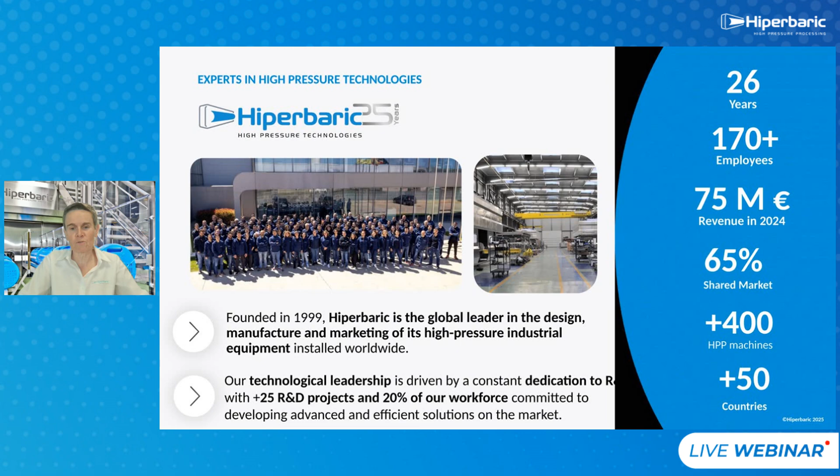Our development is really based on R&D, and we have been doing more than 25 R&D projects to develop our technology, our machines, and to help our customers develop their technology too, or to follow the needs of the food industry. The headquarters of Hiperbaric are in Spain, where I am and where Berta is. And we have sales and after sales in USA, in Miami, Florida, and also in China, in Shanghai. And we have after sales in Oceania and in Mexico. So we cover all over the world to be able to give the service that our customers need.

So starting really with the interest of HPP for juices and beverages in the industry. First, I would like to summarize the benefits for you if you are not very familiar with the technology. This is a non-thermal, minimal processing and clean label preservation technology. Non-thermal means no heat. And for juices, the advantage is that we can give a fresh-like quality for beverages, for juices, for tea, for many beverages. I will give some more details later. We can extend the shelf life of fresh juices. We enhance, of course, the food safety because we kill microorganisms. Berta will give more details in her presentation.

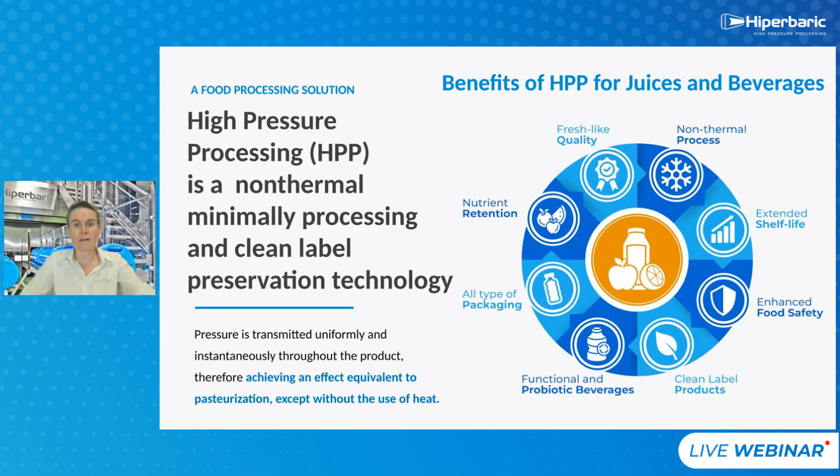We can retain the nutrition, the beneficial components of the fruit, of the beverages or tea, coffee, or whatever, because we do not overprocess and we do not heat. But the effect on microorganisms is like heat pasteurization. So it's pasteurization, but without heat. And we can use both technologies, in pack and in bulk. We can use all types of packaging, and the technology is now available in bulk for carton packs or for glass. I will explain a little bit more later.

What are the parameters? With the machine, we can achieve 87,000 psi, 6,000 bars, 600 MPa, and the processing time for juices and beverages is between 30 and 180 seconds.

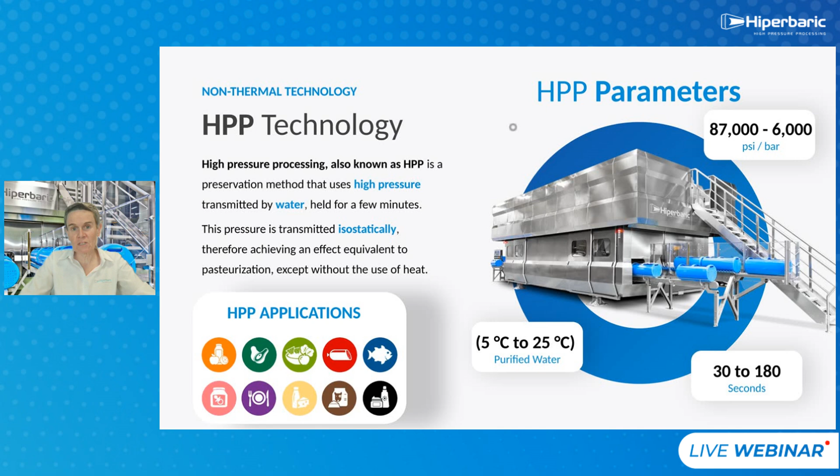And we process the juice at refrigerated temperature, classically. So in any case, below room temperature, in general from 5 degrees up to 25 if we need. In a few minutes, we can really have a pasteurization-like effect, but without thermal treatment.

How much pressure? Well, it's very big, very huge. So it's 6 tons per square centimeter. So it's 6 times more than the biggest pressure we can find in the deepest part of the ocean, in the Mariana Trench. So this is very huge, and this is the pressure we need to be able to kill microorganisms.

With this pressure, you need to imagine that in the vessel of our machine, the juice is compressed about 15%, so the volume itself decreases under pressure. Of course, after depressurization, when we release the pressure, the volume is coming back. So if you have a bottle of 1 liter, at the end of the process it's still 1 liter, but under pressure it was something like 0.85 liters. So we compress, the molecules are closer, and we make some slight molecular change in the microorganisms, and we kill them.

But this molecular change is not enough to modify the properties of the juice. But I don't want to spoil the presentation of Berta, so you will know a little bit more later.

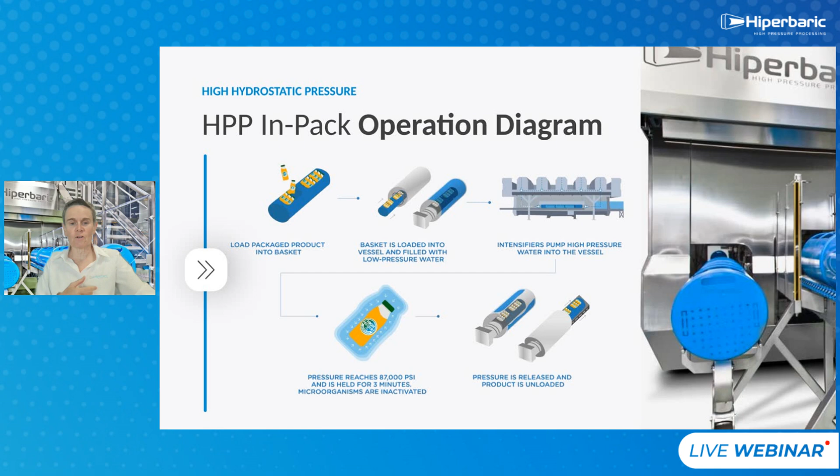How does it work? With the in-pack HPP machine, we place the juice or the beverage in the bottles, in a canister. This is the blue basket you can see. We push it inside the vessel, and then it's pressurized. And when we depressurize, the basket with the bottles exits.

Our range: we have a large range going, for juices, from 200 or 300 liters per hour up to 4,000 liters per hour machines. So different sizes, between a vessel of 55 liters up to a 525 liter vessel. Each machine is able to do from, I would say, 6 to 10, 11 cycles per hour, depending on the number of intensifiers you have.

And depending on the size and the shape of the packaging, you can fill a little bit more or less juice or beverage in the vessel. So this is why the productivity can vary a little bit, following the type or the geometry of the packaging, and also, of course, the size of the machine and the number of intensifiers it has.

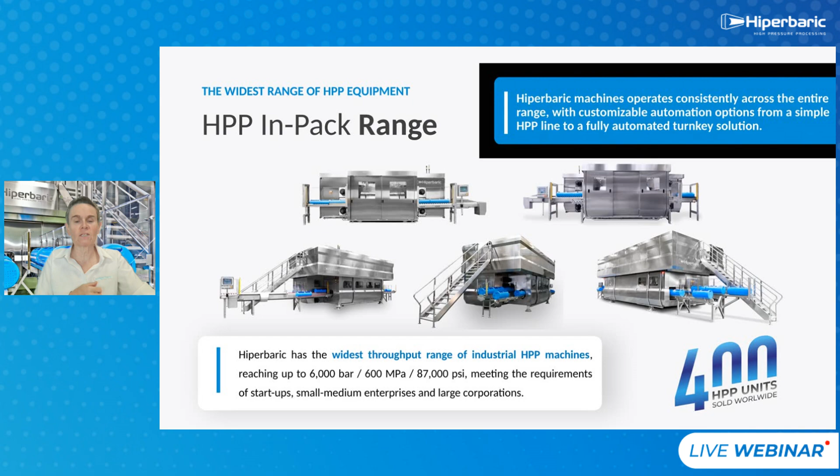We have developed and patented at Hiperbaric the first in-bulk system in the world. So this is a machine that takes the beverage from one tank, pushes it inside the high-pressure vessel, inside a big plastic pouch that can withstand 100 cycles or more. We pressurize and then we exit the juice into another tank.

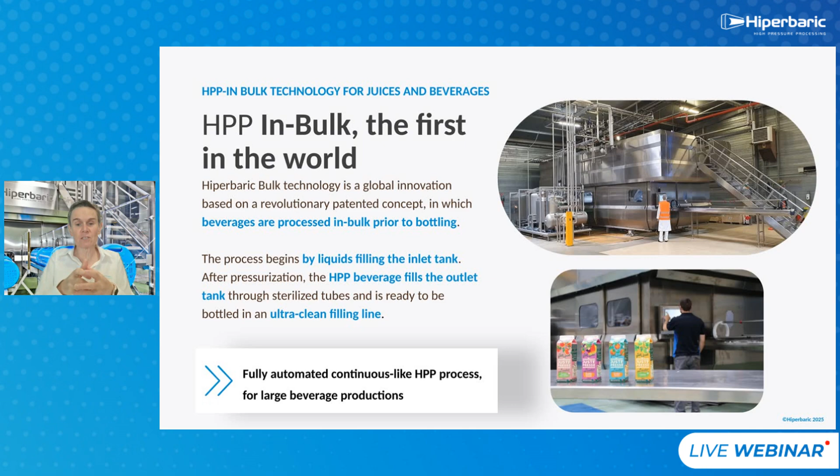And with this technology, we can have an extended shelf life line for packaging. So we can, of course, bottle the juice in plastic bottles. But it also works with carton and could work also with glass bottles. Because one of the constraints of in-pack is that you have to place the bottle or the package inside the vessel, and carton and glass would not be suitable.

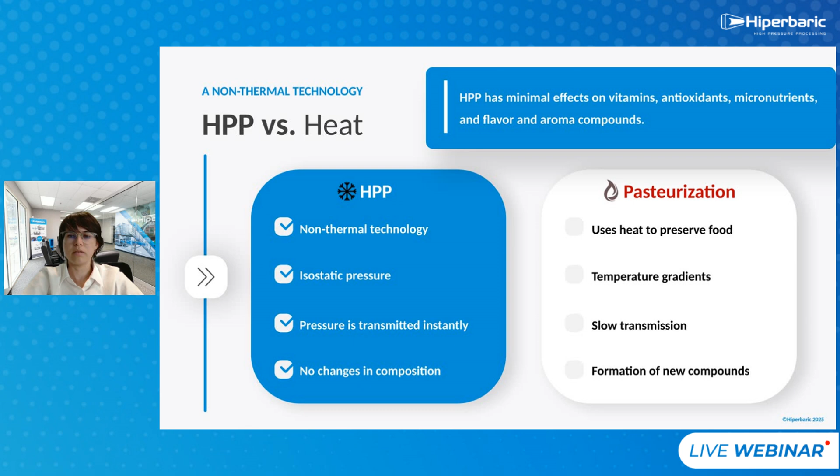So, regarding the Codex Alimentarius, we can have a classification of ready-to-drink beverages. We can find typical fruit and vegetable juices, but also nectars that add water with sweeteners, and we can find juices, purees, concentrates, or their mixture. And there are new types of drinks like water-based flavored drinks that include dairy alternatives, infusions, carbonated and non-carbonated drinks, and dairy-based drinks. So regarding this general classification, we can find several examples of HPP juices and also other formats like sodas, smoothies, veggie soups, and fruit-based water that already exist in the market.

These are the classical examples, but now there are some customers that are developing new formats like fruit-infused water, hydration electrolytes, sport beverages, CBD and probiotic beverages, and another type of natural focus beverages that promote natural focus without the use of caffeine, with fatty acids and essential amino acids. So in this way, HPP can extend the shelf life of a wide range of beverages while maintaining their unique sensory attributes and preserving their functionality.

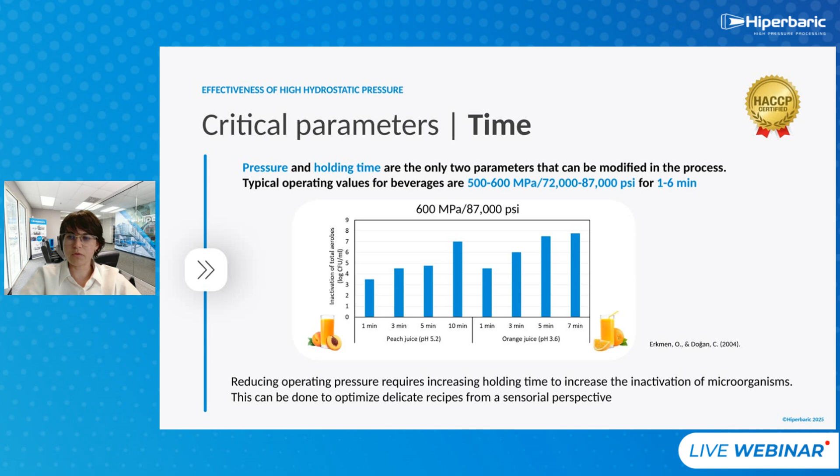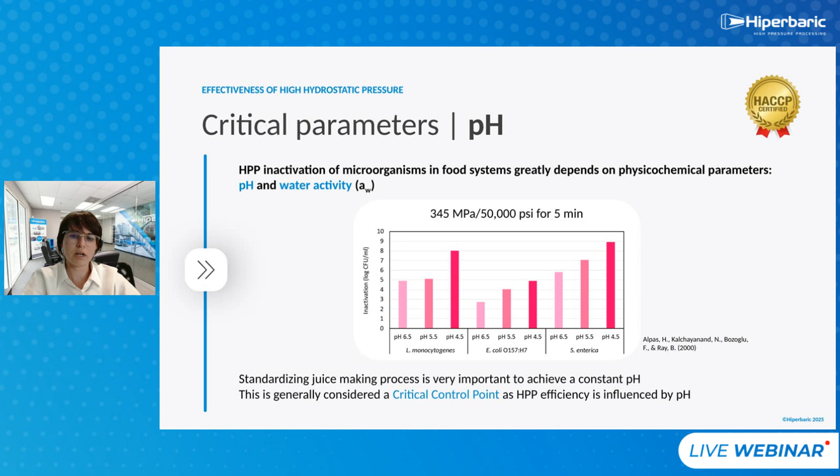And there are other critical parameters like the pH and the water activity of the products. In the next graphic, we compare different matrices from pH 6.5 to pH 4.5. The more we decrease the pH, the greater the inactivation. So standardizing the juice in production to have a constant pH is really important; it is generally considered a critical point for HPP efficiency.

And the other parameter is the water activity. Juices normally have a high water activity, but special attention should be paid to fruit purées and concentrates, which decrease the water activity of the final product. Apart from this parameter, it is important to introduce the concept of Brix, which is widely used in the juice industry. There's a good correlation between the water activity and the Brix degree: the higher the Brix degree, the lower the water activity of the product. So in this case, we put a margin of 30 degrees Brix, equivalent to a water activity of 0.96, as the minimum that gives a good high inactivation with HPP.

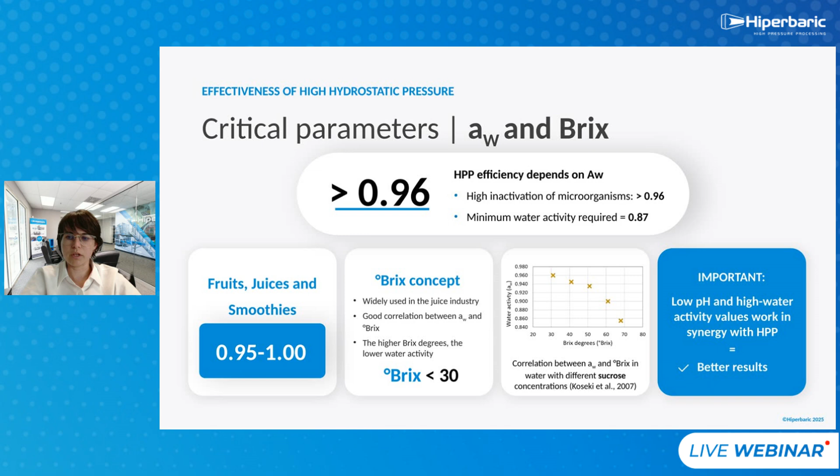It is also important to say that from a regulatory perspective, in the USA, for example, high acid juices with a pH lower than 4.6 are covered by the juice HACCP regulation. Usually the FDA requires a process validation. And for low acid juices, the process has to add control measures against the Clostridium botulinum risk, as HPP does not inactivate bacterial spores.

Another study that has shown the effectivity of HPP against different pathogens is from Cornell University, where they studied 12 commercial juices, and after applying 550 megapascals for 1 minute, they achieved a reduction of more than 5 logs of Salmonella, E. coli, and Listeria monocytogenes. And that is the FDA regulation.

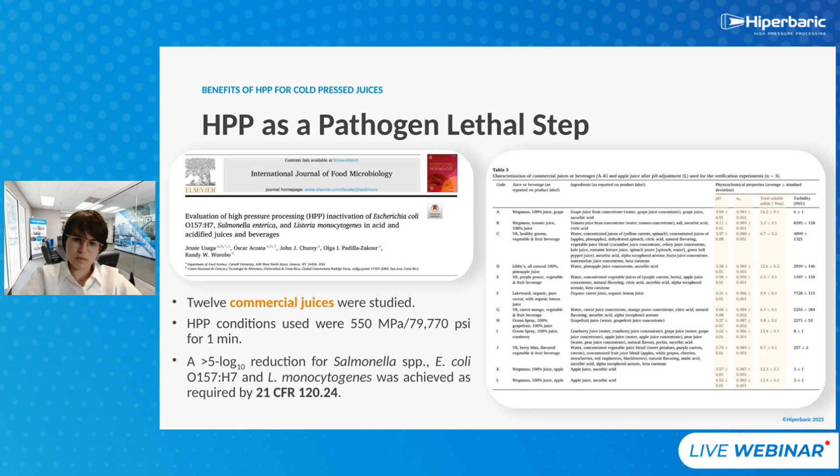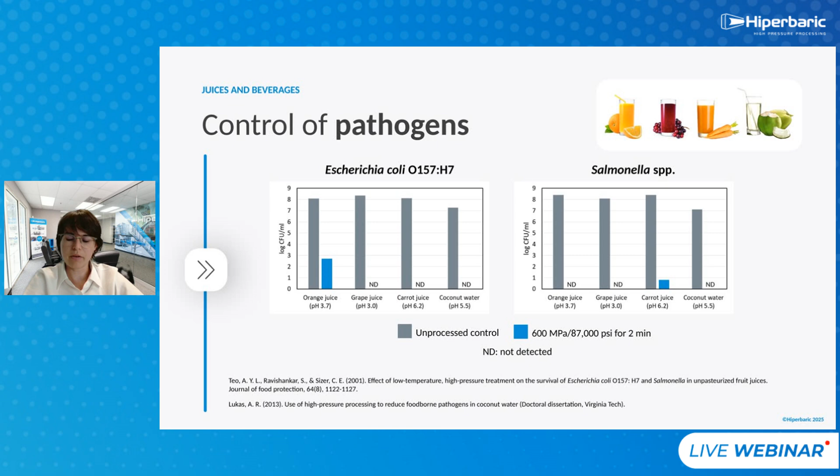Other examples also for E. coli and Salmonella in different matrices like orange juice, grape juice, carrot juice, and coconut water. In this case, they study 600 megapascals for 2 minutes is enough to reduce more than 5 logs these two pathogens. And the next slide shows also the Listeria monocytogenes in different matrices like apple juice, orange, peach, and carrot juice with different pressure and times.

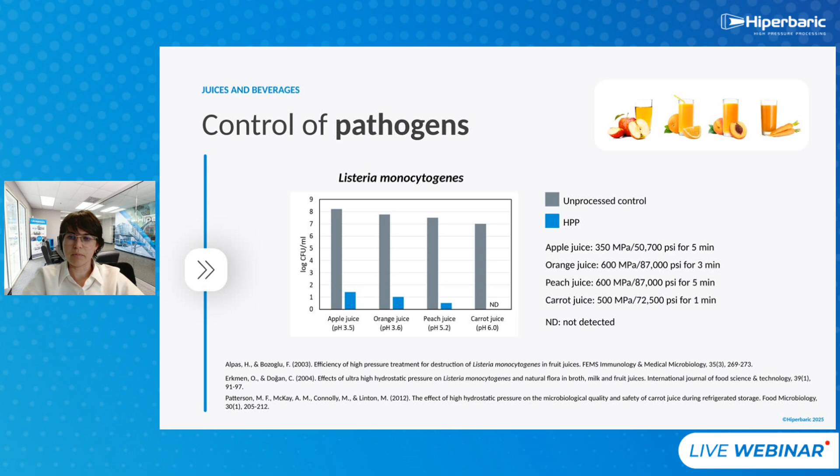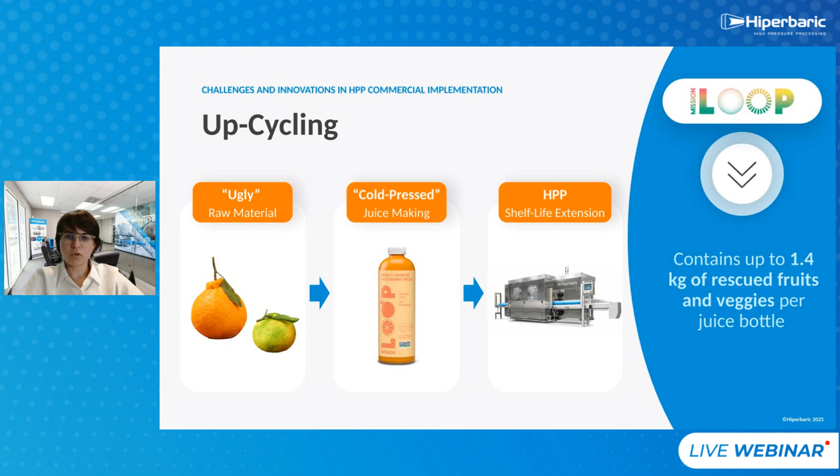And the new challenges and innovations are, of course, sustainability, as Carol has already introduced in her presentation. The new challenges are focused on the raw material, in this case the upcycling method, and also the packaging to process the product. So for the first one, I want to show you a case study of Loop Mission, our client that takes ugly raw material and uses it to cold press the fruit. Each bottle contains up to 1.4 kilos of rescued fruits and veggies. Later they use the HPP technology to preserve all the nutrients and bioactive compounds of these juices.

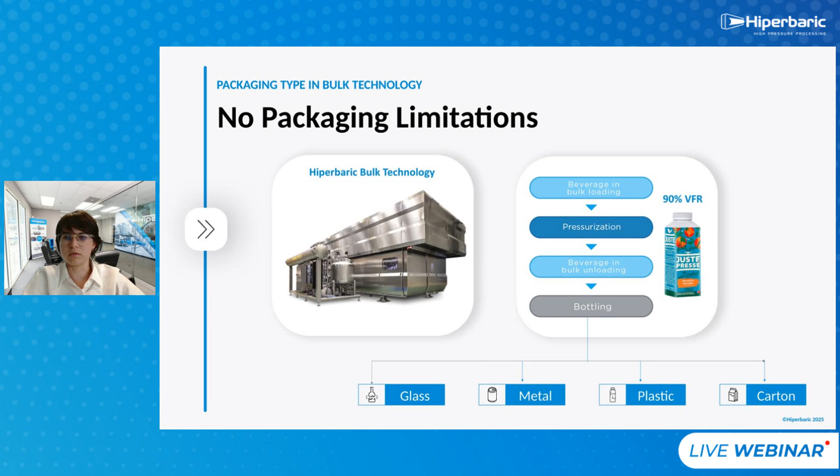And the type of packaging we can process in Hiperbaric technology has no limitation, because we have validated square, round, and little shots, and also these new sustainable materials, or even different shapes, like cone shape for carbonated beverages and the kegs solution. And as Carol has already explained, there are no packaging limitations because we can bottle the juice in glass, metal, plastic, or carton. So these are the new types of solutions that we have.

So to sum up my presentation, HPP technology can preserve the sensory, nutritional, and functional attributes of cold processed juices. The technology is suitable for new product categories, and it is already used as a lethal step to inactivate pathogens in cold processed juices. This way we can ensure safety and regulatory compliance. Finally, the alternatives to conventional plastic bottles and upcycling strategies are suitable for high pressure processed juices and beverages.

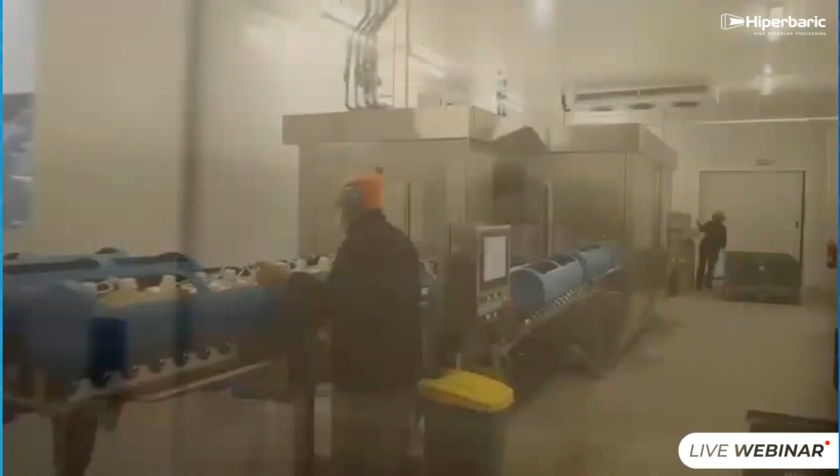Okay, now I'm going to share a presentation by Gufresco on what applying HPP to our products means for us. First, introduction of Gufresco. Gufresco is a leading food service company in Spain, founded in 2007 and part of the Jefe Union Group. We are a national supplier of fruit and vegetables, natural juice and other products for Horeca, Travel Channel and supermarkets. Our specialization is 100% natural orange juice in first place, multi-fruit juice, and fresh cut fruit and vegetables. This is fourth range of fruit and vegetables. And our commitment is quality, freshness, and food safety.

Okay, what is HPP technology? The definition is clear: it is high pressure processing, and it has basic operations. First, the packaged product is placed inside the chamber. Second, it is subjected to pressures up to 6,000 bars using cold water. This is a very important point, because using cold water prevents the product from undergoing changes. And third, the high pressure inactivates pathogenic and spoilage microorganisms without affecting vitamins, flavor, or aroma. As a result, we extend the product shelf life without significant changes to the product.

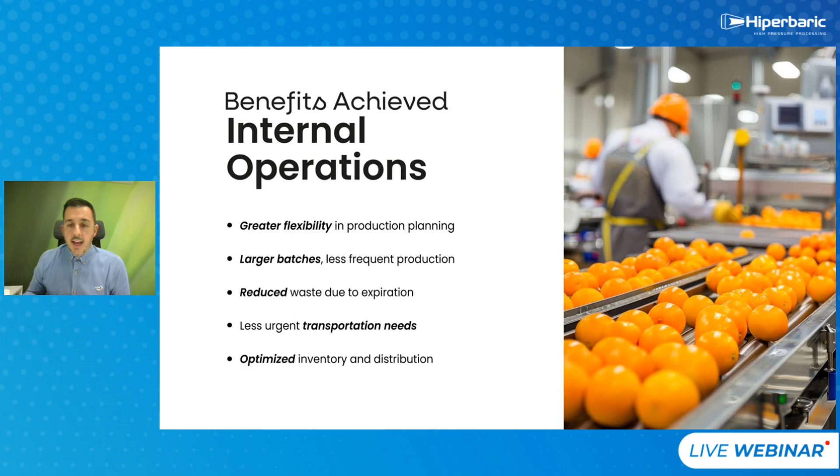And third, improved internal operations. In terms of production, we have greater flexibility in planning, larger batches and less frequent production runs. And with regard to logistics and storage, reduced waste due to expiration, less pressure on urgent transport, and optimized inventory and distribution.

Okay, now I'll speak about some key cases and figures. As I said before, shelf life for our product was 4 or 5 days, and now with the HPP line we have up to 30 and 60 days, always with the product refrigerated. This has enabled us to sell our juice to customers we already worked with for other products, such as supermarkets, airports, shops and restaurants.

Second, the waste reduction is around 25%, and new markets. Before, we only worked here in Spain because the shelf life of the product was 4 or 5 days, and now we can work in Germany, France, UK, and Netherlands, and we can have international expansion for the company.